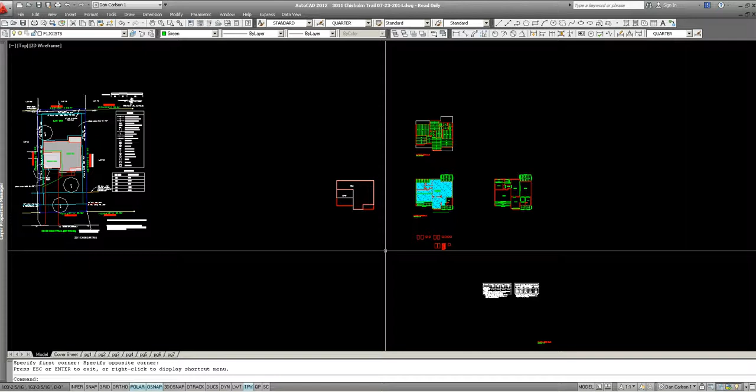Alright, I'm also going to show how I add the plumbing to the foundation plan.

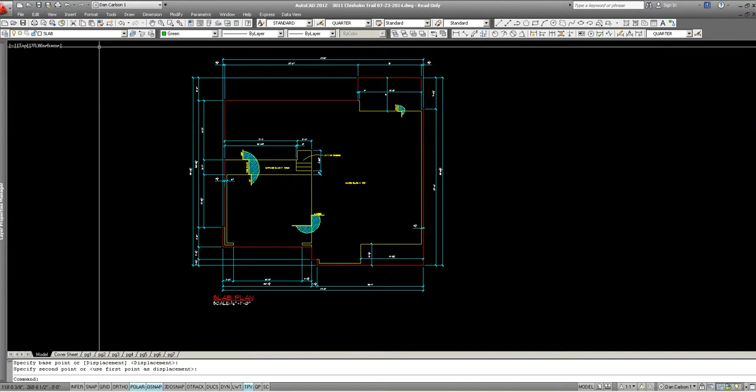So here's the foundation plan as it was earlier, and we need to have the toilets and sinks and so forth. So what I do here is I actually turn on the F1 doors layer, and I copy all of the items, which in this case is a commode, a sink, and the kitchen sink. I'm going to go and do the water heater as well.

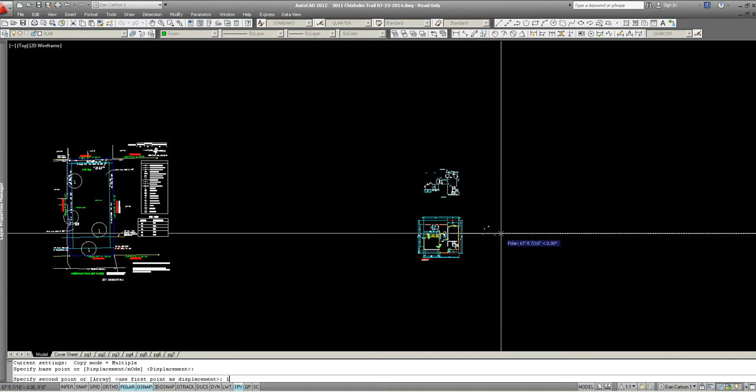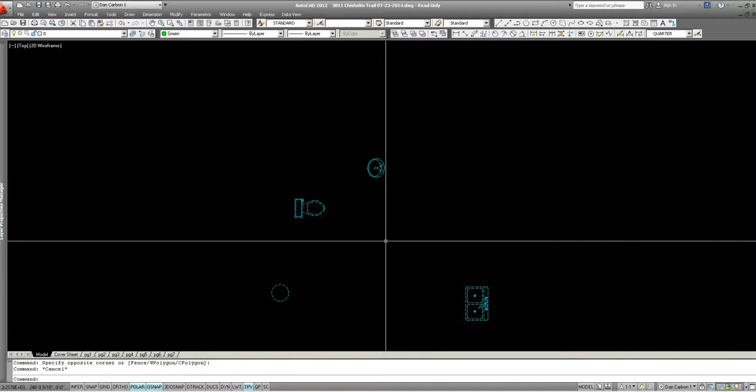And I just move them, whatever, 100 feet, let's say. Copy, and then I explode them. And when I do that, I turn on the zero layer because they turn into zeros. And then I come in here and change them to the slab layer and turn them blue and make them dashed like that. And then I move them back 100 feet. So a little monotonous, but it works. Gets the job done. Now we can turn off the doors, F1 doors.

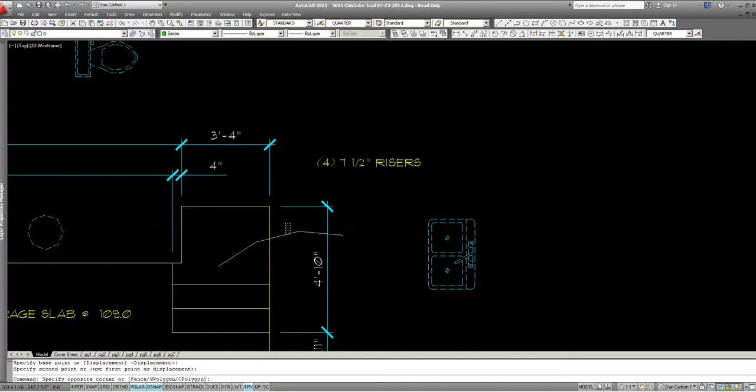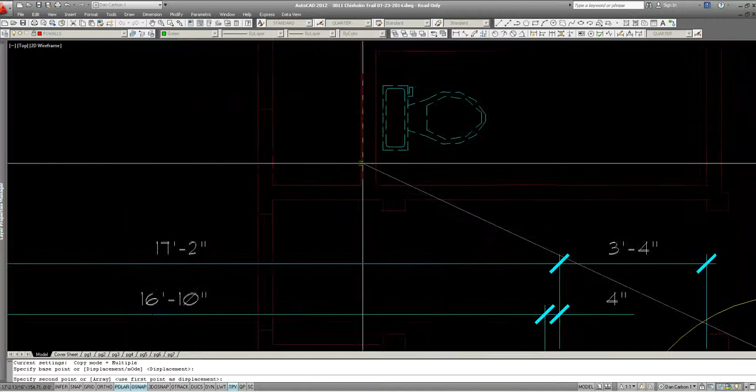But now we need, let's get this here, we need the walls behind it. So we go ahead and turn on the wall layer, or F1 walls. I'll go ahead and lock it. And what I'm going to do is actually try to grab a line. Where have I got a line? Is that a line? There we go. Here's a line. And just copy them behind here on these walls, like this.

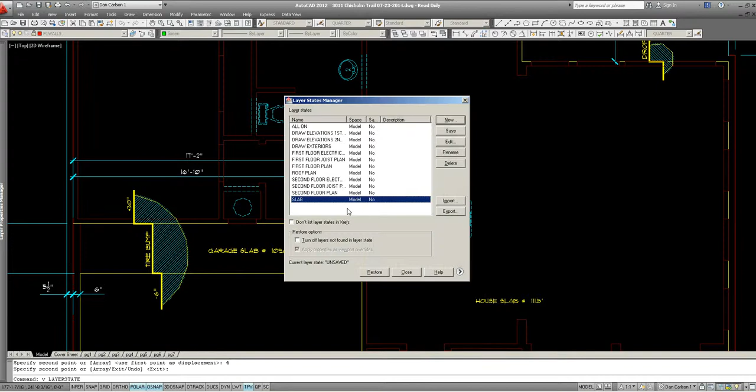And the sink, I don't think there's - maybe there's a half wall. Let's see. There it is. So what we'll do is just go to the zero layer again and draw a couple lines behind the sink here and here, and then go back to the slab plan. Turn on the zero layer.

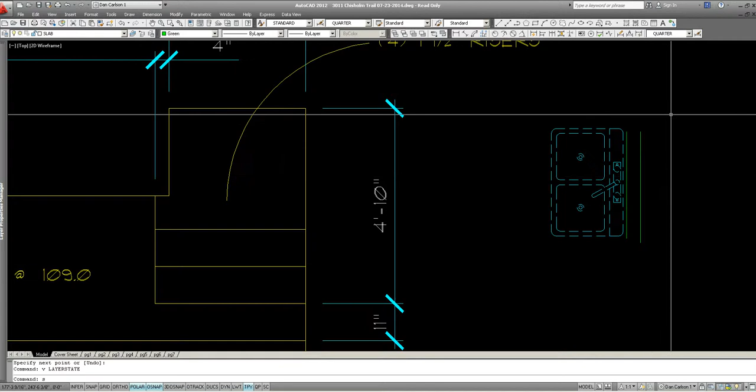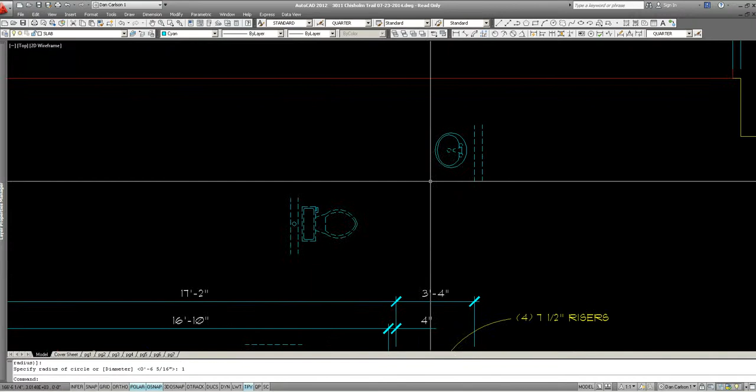And then I'll go ahead and just draw a little circle in each of these spots behind it with a 1-inch radius, so a 2-inch diameter. And this actually represents where the sewer line would go. For this, it's just going to be where the manifold goes, where all the pipes come in and out of the ground for the water heater.

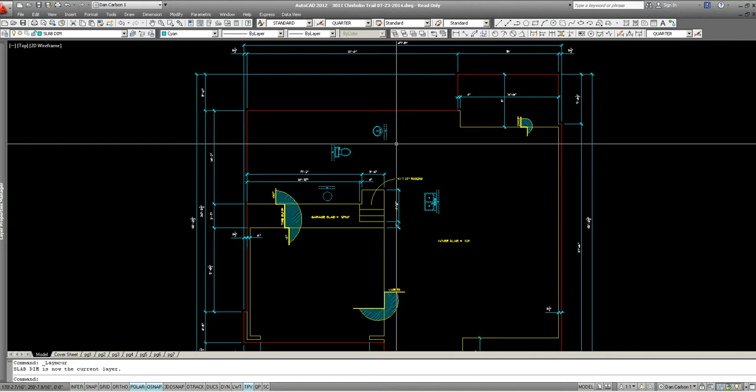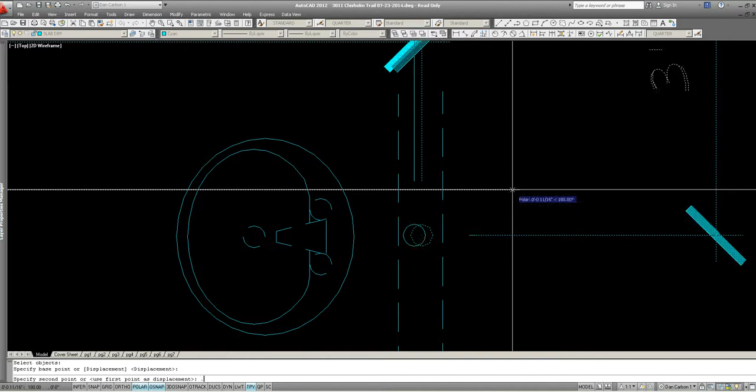Now we can take our dimension and add where these are located. I don't like 3/4, so I'm going to make that an even number. And then let's see. Here's 1/4. So we'll go back 2.5. There we go.

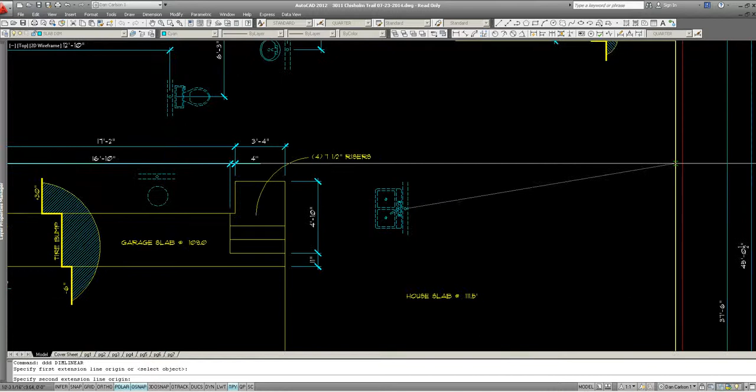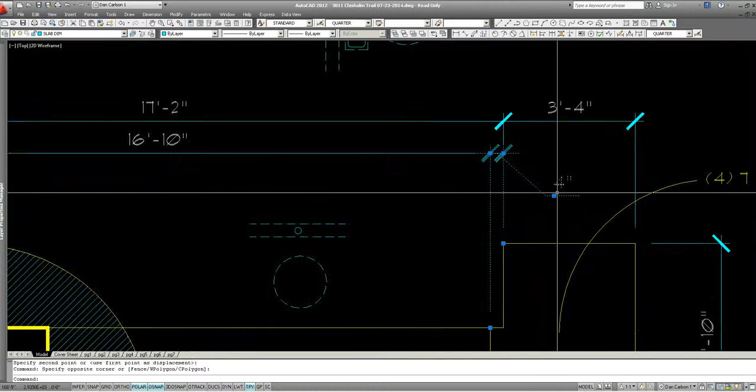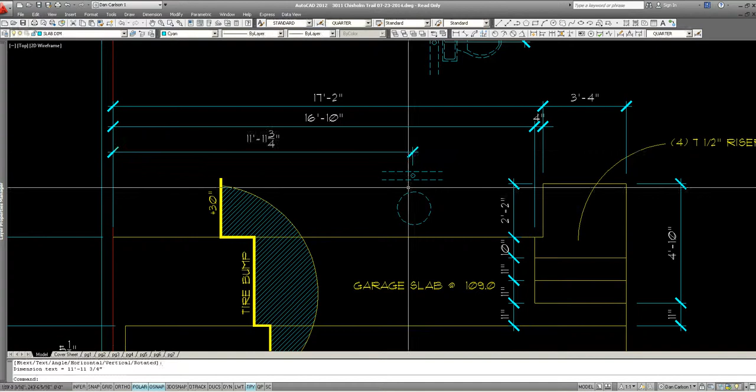Again, we measure to the outermost form board. And here. Just moving things out of the way. Looks like we just have these here. And this goes here, like that.

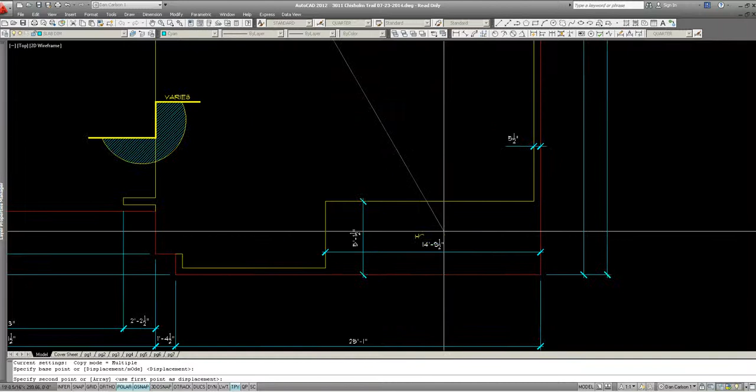And you can put a little note here in case they're wondering, what is that? That's the water heater. And I'm going to go ahead and add a little note here. Better yet, we'll do a—

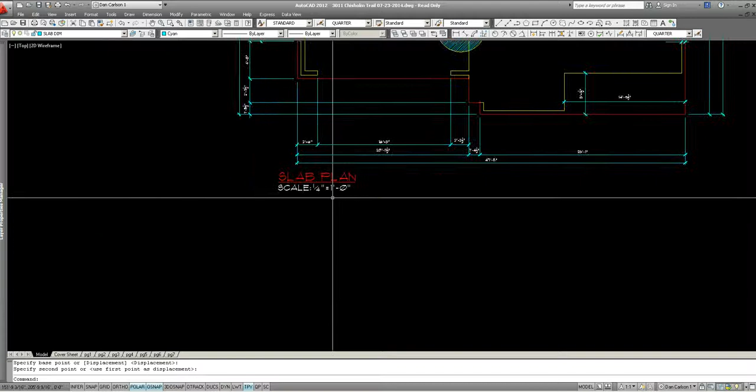I've got some floating around here. Here you go. If you look down here at this part of, if you look around for each drawing, I've got different notes everywhere. So like here are all my notes for slabs. So we'll move these up here. And you've already got that, but let's add this note here, and this just says this is not an engineered plan. It's just basically information. Let's put this here.

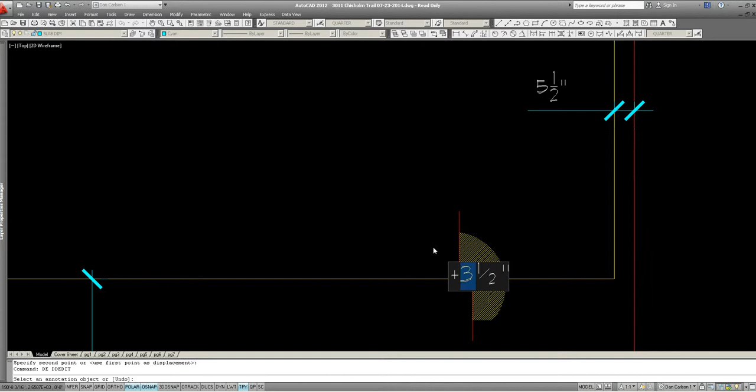Like this, and we're going to say, let's do 5.5. Is it a polygon? Yeah. Now we'll make a match. Why not?

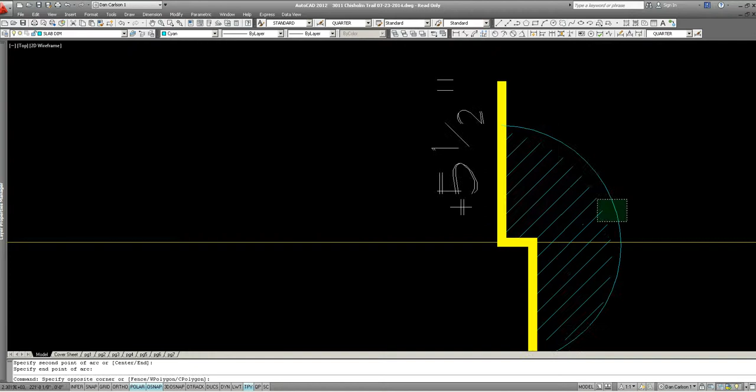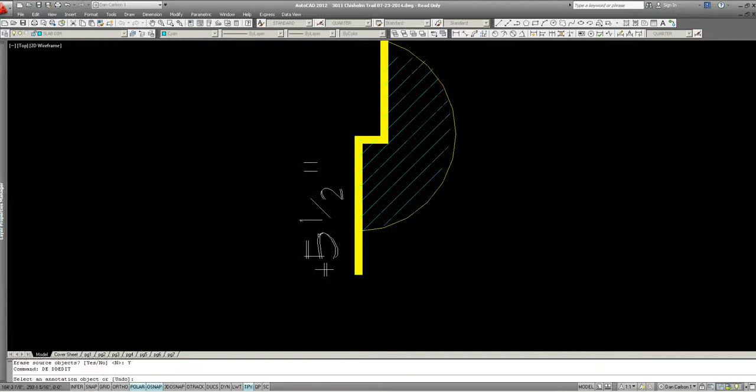So there we've got a 5.5 inch drop, and then we can go ahead and put it over here as well. And this will be a 1.5 inch drop because at the back we have a hill and we don't want to have much of a drop at all. Minimal as possible. Like that. And that's how the slab will look when it's all done.